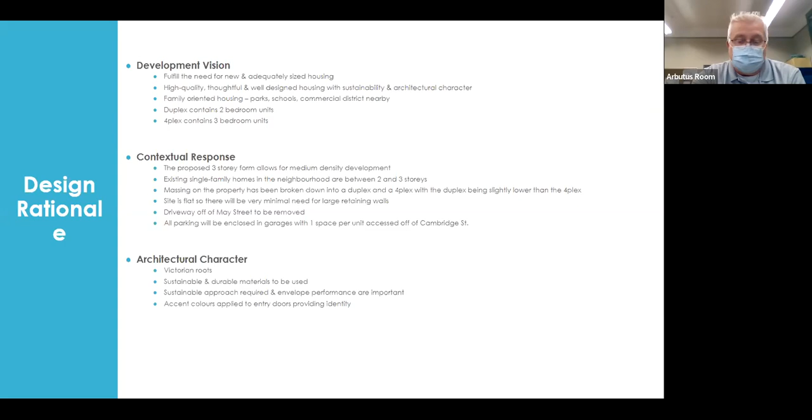So the proposed project seeks to transform the southeast corner of May and Cambridge Streets from a well-used duplex to a friendly duplex and fourplex with traditional neighborhood character.

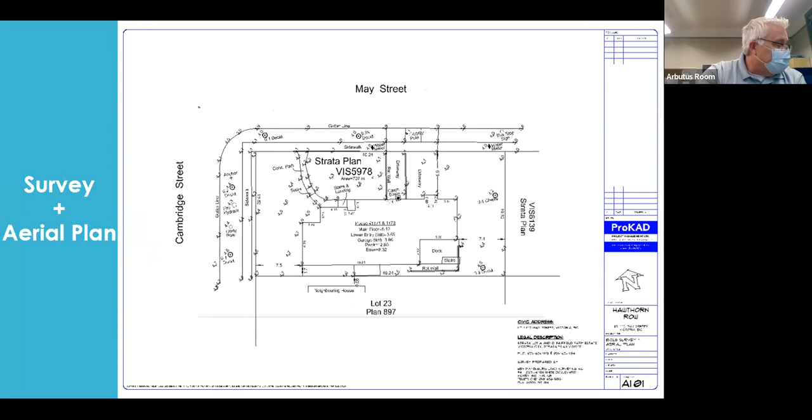So is this the PDF? Sorry, is this the PDF? There's some... okay, I'm going to skip over that one because for some reason...

And the other bottom corner is... how can I move that? It seems like it's in the way here, sorry. Where's my technical person? There we go.

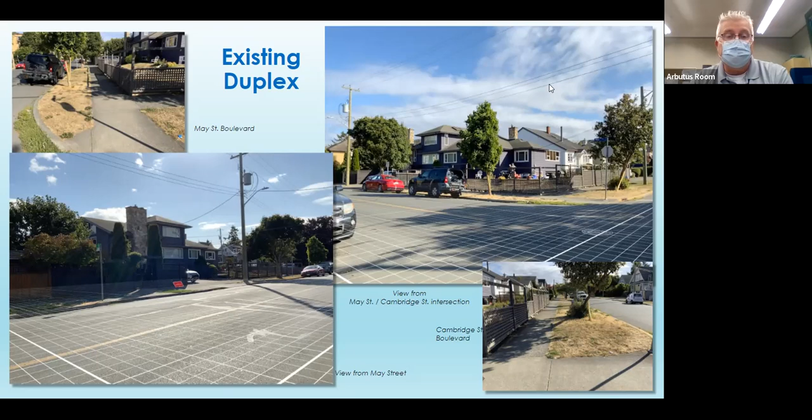The bottom one is looking down the Cambridge Boulevard, and that's where the access to the back of the units will be off Cambridge. The bottom left photo shows the driveway off of May Street. That'll all be removed, and it'll just be basically a sidewalk and the entrances to the units.

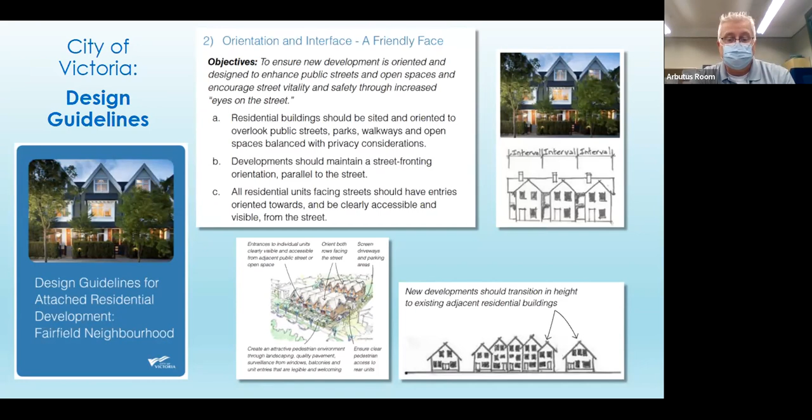In several articles, I'm sure you're all aware of the missing middle with regards to family-oriented townhouses, duplexes, row housing. We're basically calling this a row house style of design, and it seems like it's a missing component of the City of Victoria. We feel that the design allows for some family, some empty nesters even. My two clients are actually going to be owning and occupying 2 of the units, so 4 of the units will be on the market. Their intent right now is for them to be owner occupiers of the units.

Oops. Sorry. Oops, oh I'm sorry, not friendly with... there we go, thank you.

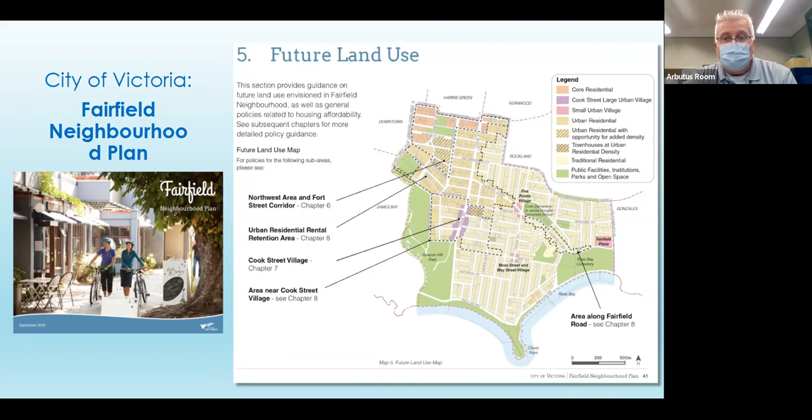Fairfield neighborhood plan, future land use. The property is in a traditional residential area outlined in the OCP, which allows for a 1.1 floor space ratio. What we've got here is 0.93 to 1. I'll get into those drawings shortly.

So the building types here are single detached dwellings, housing conversions, duplexes, and as it goes on it talks about generally ground-oriented residential buildings, including houseplexes and townhouses. So following the guidelines within the OCP.

Going quickly through the lower floor plans, each includes an enclosed garage, one visitor stall between units, a small den on the duplex unit, and a larger den/office on the fourplexes. They're pretty well identical units other than being flipped. The duplex, once we get to the elevations, you'll see is a little lower in height versus the fourplex.

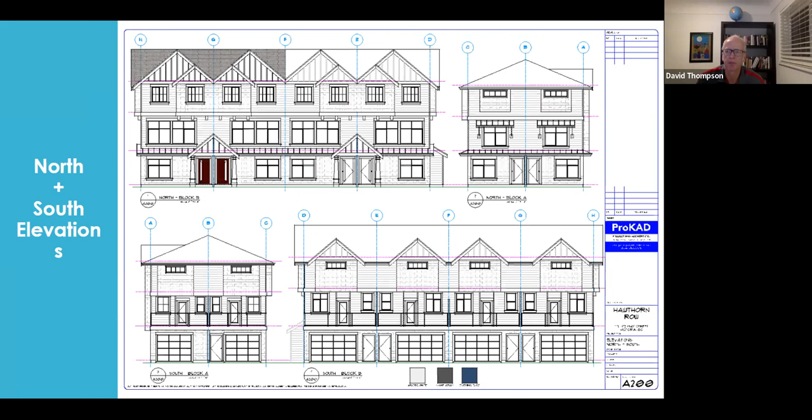Are you referring to this bottom elevation here that I'm showing right now? Yes. It's a tricky issue. Number one is you have a neighbor on the south side, so you don't want too much fenestration on that side, exposing yourself to that neighbor. You want to keep some privacy. I understand your question there.

If we look at the floor plan here, we've tried. There's definitely some ability to throw some more windows at a higher level as clerestory windows, or make them at least wider. Those aren't really private issues, so yes, that could definitely work. Once we get down to the main floor, there's an ability to increase some windows there as well.

But once again, you can see it's a storage area, it's a china buffet unit right now where people can put their dishes for their dining room table. And then there's a small window next to the powder room.

So, if you get down on the lower floor, I was proposing to have the doors glazed, fully glass, rather than having a white fiberglass door that you see on most houses, just to open it up a little bit but still keep privacy.

Yeah, that makes sense. So does that answer your question? Yeah, thanks, that takes care of it. I was thinking ground level would be best. That's great, okay, thank you.

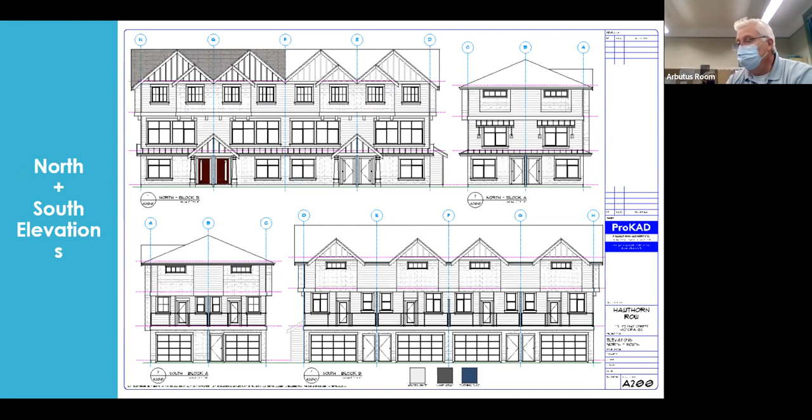Anybody else from the committee? Ashley, Dawn? Yes, Michael.

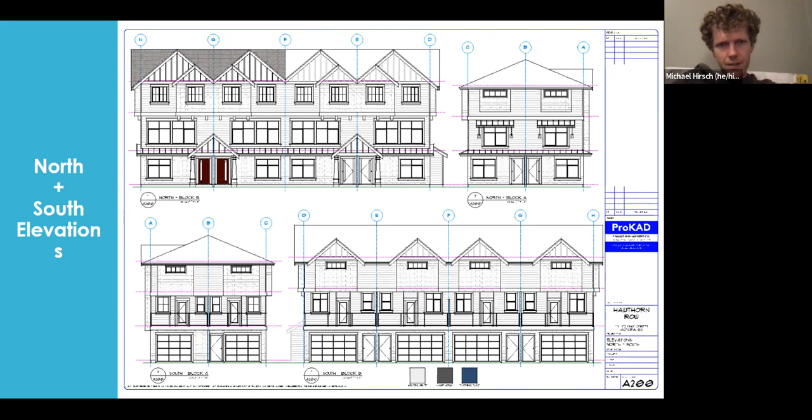I have a question, Joanna. Thanks for the presentation. I was wondering if you have any stats to contrast this with the current zoning, like in terms of height, site coverage, and maybe just curious what the square footage of this lot is. Just because I know right now this isn't on Cook or something, it's very much amongst the single family dwellings in Fairfield, to get a better sense of how this compares with what's there.

Good question. So basically we have here a site area of 8,582 square feet. Can you see that on here? Oh yeah, there we go, good. 8,582 square feet, and that's our floor space ratio of 0.93, where part of the neighborhood plan allows one-to-one.

I've had some preliminary discussions with Alec Johnson, city planner, about a year ago before we started designing and developing this. So there's no specific zone for this. He did give me a number of different zones. Excuse me one second, Gerald, do you mind passing me the folder there please? Thank you, sir.

He had, basically, the RK zone, the RT zone, and the RJ zone as reference for density, setbacks, site coverages, and so on. So honestly my next step was to hopefully go from this meeting to Alec and have some more fulsome discussion with regards to density and site coverage and whatnot.

But as far as relative comparisons, kitty corner to this there's a 3-story commercial apartment building on the corner of May Street and Linden. It's pretty monochromatic, just a square box, pardon the expression.

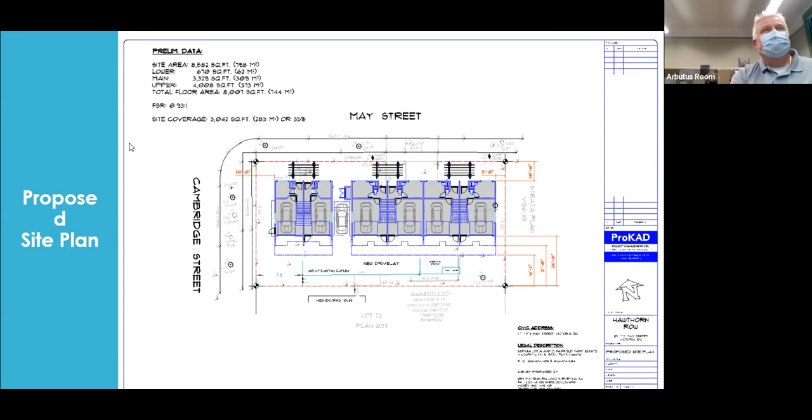So just on that last point, there's quite a tall duplex directly behind it, and then there's the 3-story apartment at May and Linden, which I'm not sure what the relative heights of those are — I was trying to figure it out on the map, I couldn't see it. But my question is about the end facing of the duplex onto Cambridge.

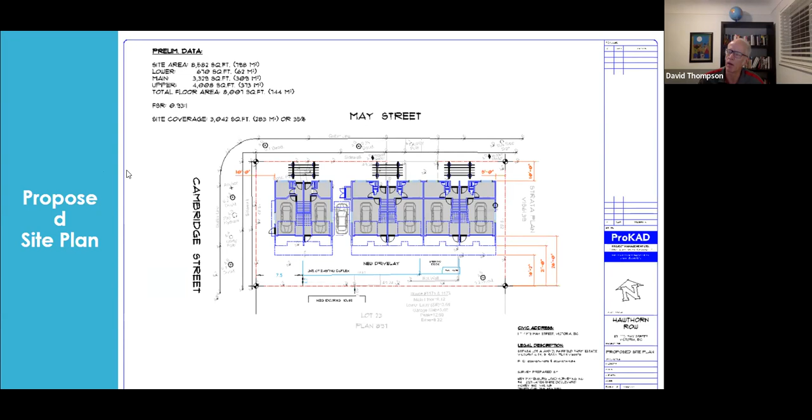Can you navigate to that slide? I think you were trying to show that there was an entryway there. Yep, certainly, just bear with me here. There we go, there it is. That's the top left one, right? Yeah, the top left one, the block here.

I was just wondering, partly out of interest in eyes on the street and CPTED type design, if there's any opportunity to have maybe a more traditional looking entry, with something above that door so it doesn't look like a utility door, and maybe centered, maybe a bit more window.

No, totally understood. Do I really like this? Sometimes when you do a design you look at it and go, yeah, I'm not quite happy with it yet, it doesn't kind of flow. So I totally agree with where you're coming from, Dave. It's missing something, and certainly I can work on that and make it more — you know this stuff way better than I do, and maybe plantings will change the aspect of it too.

No, good points. And I must credit one of the owners here that basically came up with that thought of bringing that to that side. So thanks, Stephanie, for that. I'll work on augmenting that a little bit and making it a little bit more friendly.

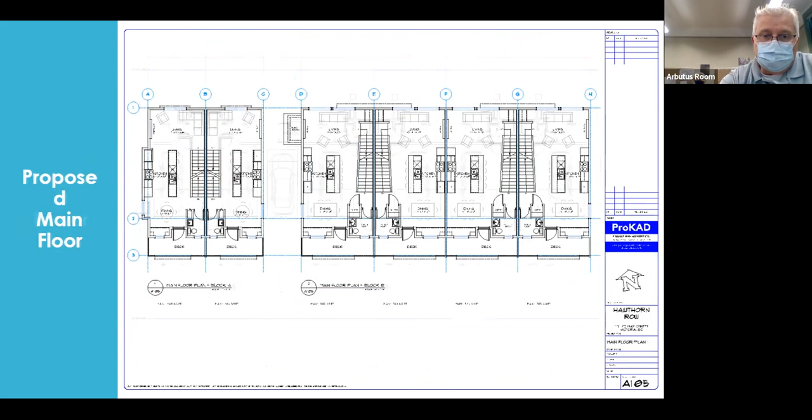And in the garage, if you want to go to the garage oversight, this is also one of the... it's not obvious to us. Now I see there's a den in each unit.

What about parking for bikes? Yeah, bike parking, we've got it. I don't know if I can zoom in on this, but if we look in here, there's a bike storage rack that would be included in all of these units. So there's a bike storage rack that's there.

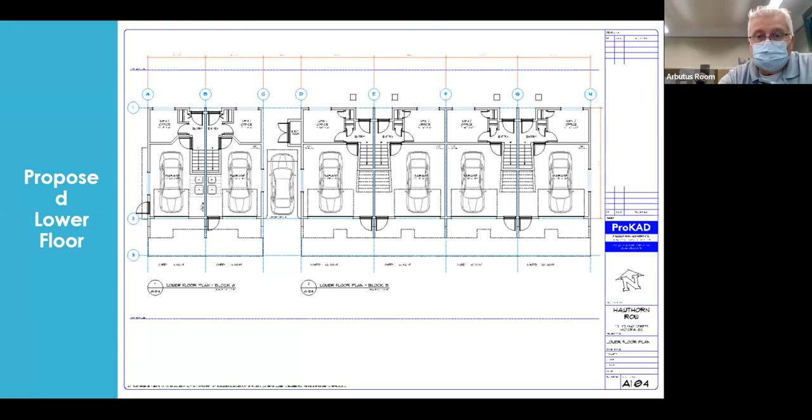Now this particular building I find quite interesting because it's level entry. And if you were to consider, because these are going to be resold, if I came to you and said I'm really interested in the end unit but I need accessibility - so I like the fact that it's ground level, but I'd like to put an elevator in there so I can get to the second floor.

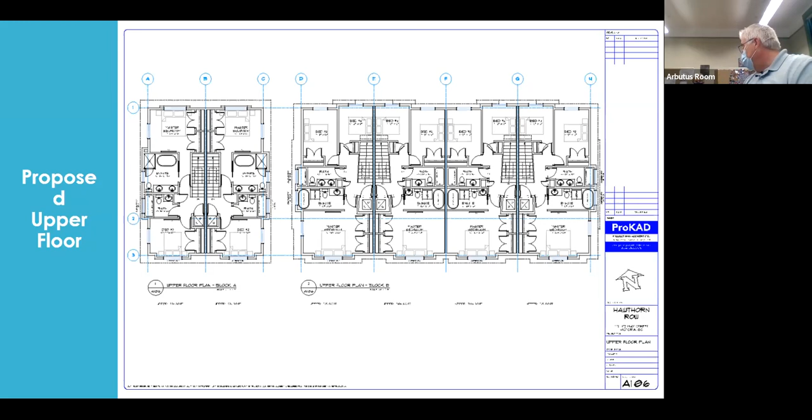Yep, and I'm willing to pay for that. Is that something that... most definitely. I've already talked to my clients about that. Once these units go on the market, if someone came to them with that request, I've already looked at areas where we can either put in a lift, or at minimum reinforce all the stair walls to allow for a stair lift up there, like one of those stair lifts that go up and follow the stairs. But we can include a lift somewhere into the plan - it'll sacrifice something in the space, but I've already had that discussion.

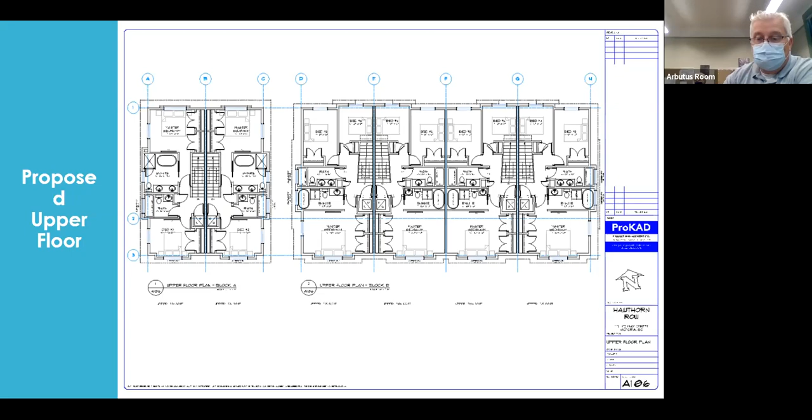And so green space is really not there. There's green, so the yards are all the front yards of the units. The end unit of the duplex you've got the side yard, and the end unit of the fourplex you got a little strip of grass. But basically the fronts with the pergolas and the gate, that's the yard per se as far as soft landscaping. In the back you've got the decks and pavers. We haven't had that fulsome discussion yet with regards to pavers or concrete, what we're going to do in the back to soften it. There's obviously a landscape strip on the south property line with the neighbors, so there'll be some softening of the landscaping there.

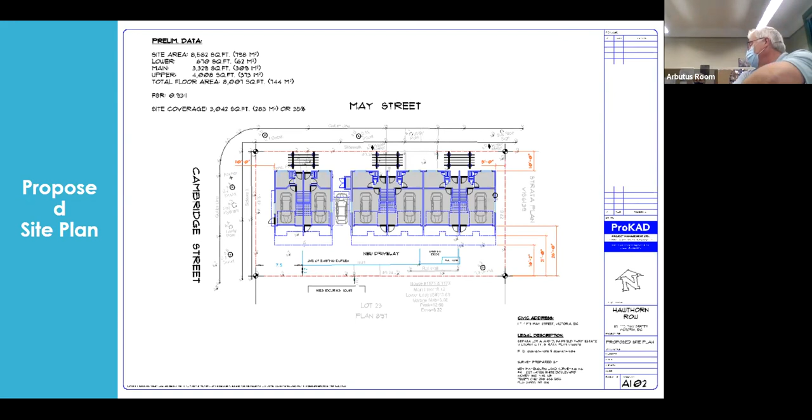No, the whole idea is to make it almost like precedent setting for that whole corner. I think we just want to have that - this project I think will be quite prominent coming to that corner and set precedent for others down the way.

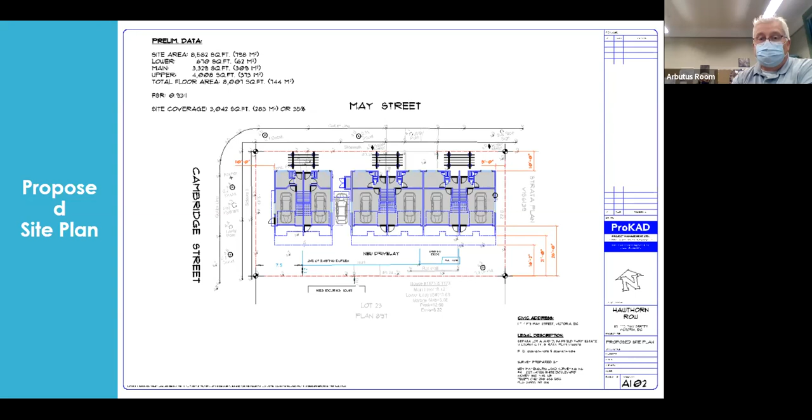Well, I don't have any further questions. Anybody on the committee? Dave, you have your hand up again?

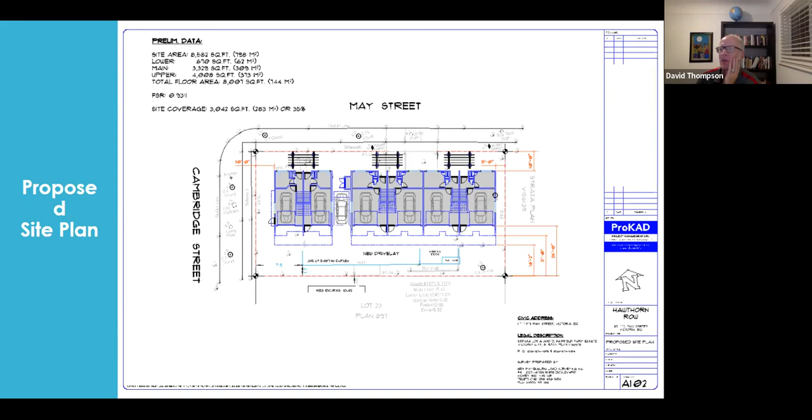Yeah, I'm just wondering if you could show me that Cambridge face again. I just had another thought. There you go, sir.

There it is. Yeah, and the reason I had this thought was because Joe is on the call, and I happen to know that he has a place down at Superior and Oswego that is designed a lot like this one, and it has on that second floor a balcony looking out on the street, and it presents quite a nice bit of community with the street. And I know because I lived in it, there was a good bit of interaction - we would be out on the balcony interacting with people on the street. So it's good eyes on the street for the back lane, as well as just a nice way to face the street.

I keep suggesting these things that raise price though, and that's not my objective here. No, but it's also blending in with the community too, very valid comments of what you've got there with having that friendly community, that connection with the street. So yeah, and I've also been involved with some crime prevention through environmental design type discussions recently, so it's all coming to mind. No, that makes total sense. Yeah, perfect, thank you for those comments.

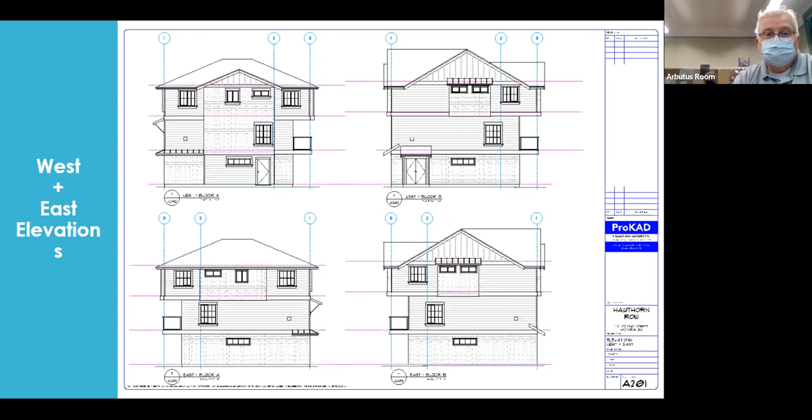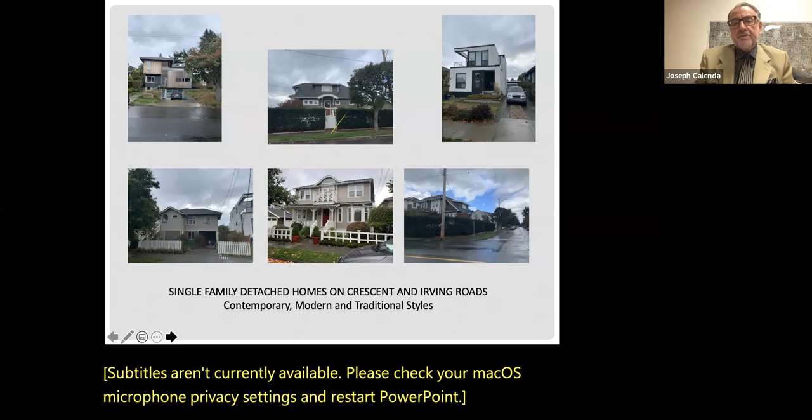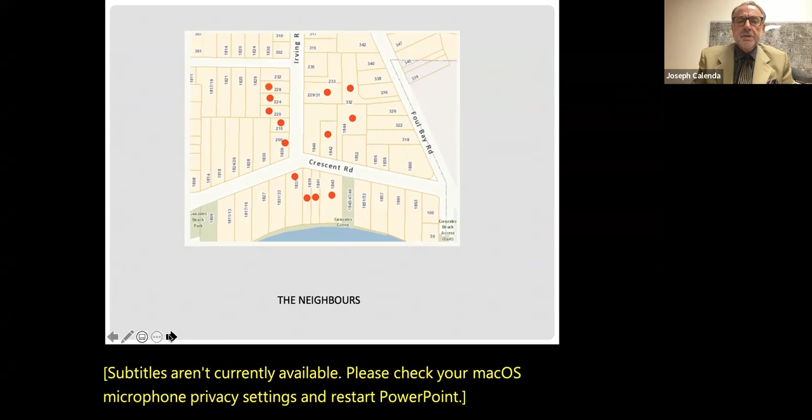These are photos of the houses around our house, and you can see that they're all single-family houses, and they come in a variety of styles, some more contemporary and some more traditional. This is a map of the neighbors that we contacted back in September of last year when we did our first small lot petition, and we intend to contact the same neighbors when we do our next small lot petition.

So this is our revised proposal today, and you can see in the profile that it's a 1.5 story single family house with a peaked roof, more traditional design. I just want to talk about the differences between what our design was in September 2020 and what our design is today in December 2021.

In September 2020, we were proposing 2 lots and 2 houses on 1,300 square meters of land. Today we're proposing 2 lots and 2 houses on 1,300 square meters of land. Our first proposal from September 2020 was a shed roof, modern 2-story house with 156 square meters of floor area, that's 1,680 square feet. Our design today is a peaked roof, more traditional design, 1.5 story house with 159 square meters, or about just over 1,700 square feet of floor area.

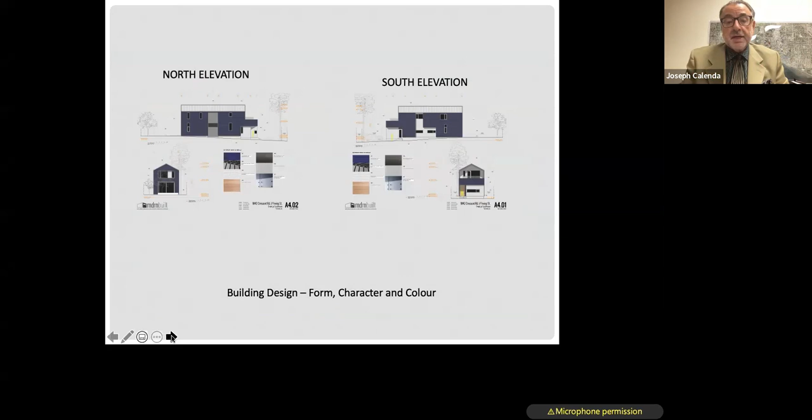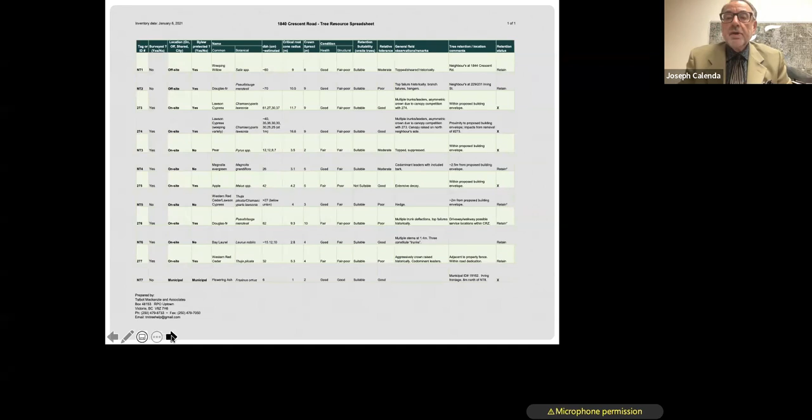We have a tree management report, and our tree management report indicates that there are 5 trees on the proposed small lot. 4 will be removed, including the apple tree, the pear tree, and 2 Lawson cypress trees. The Douglas fir will be protected during construction as per the tree management report. This is our catalog of trees on site, and it shows which trees are being removed and which trees are being retained.

More trees will be planted on site in replacement of these trees that are being removed. Our landscape plan shows the new plantings, and our site plans, building elevations, and landscape plans are available on the development tracker for anyone who wishes more detail.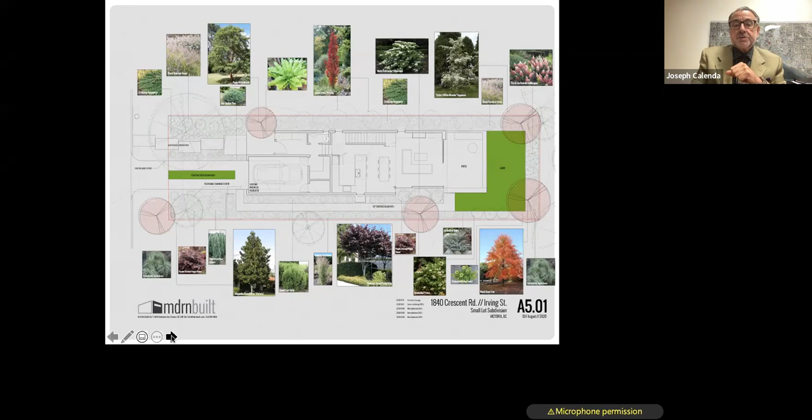So just to summarize, this application is already consistent with the Official Community Plan. It's already consistent with the Gonzales and Fairfield neighborhood plans. It represents good urban planning, good urban design, good landscaping, and good architecture. It fits on the site, it relates well to the street, it fits in the neighborhood, and it achieves the small lot design guidelines.

This application redevelops the site fully, completely, and sustainably, and carefully in consideration of future citizens. It takes the long view, and it doesn't underutilize the site in 2021. This is an almost 14,000 square foot lot with one house on it.

The environmentally responsible density value here is 2. So we're increasing the lot yield from 1 household to 2 households, all in a single family building form, consistent with the neighborhood as it is. So we say this application deserves to be approved on its own merits. It represents neighborhood planning best practice in 2021 as we respond to the housing emergency in Victoria.

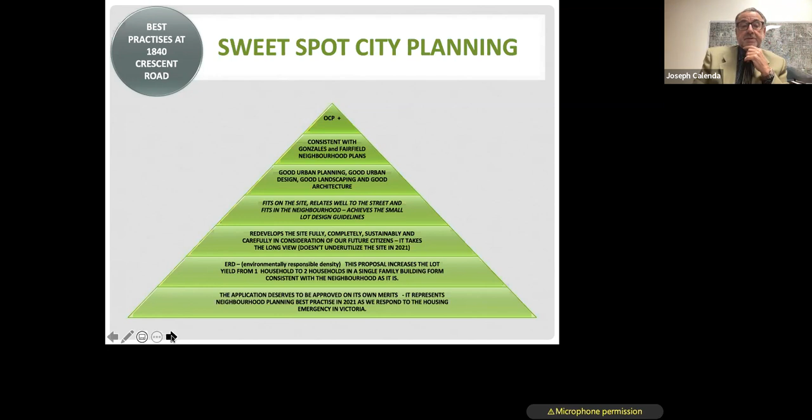So a small lot house on the corner of Crescent and Irving Road. Thank you for your consideration, and I'm looking forward to answering your questions.

Joseph, I just have a question about your presentation. We're not seeing any layout or specifics about the house as a building. Is that something that was omitted for a particular reason? Normally we see layouts and...

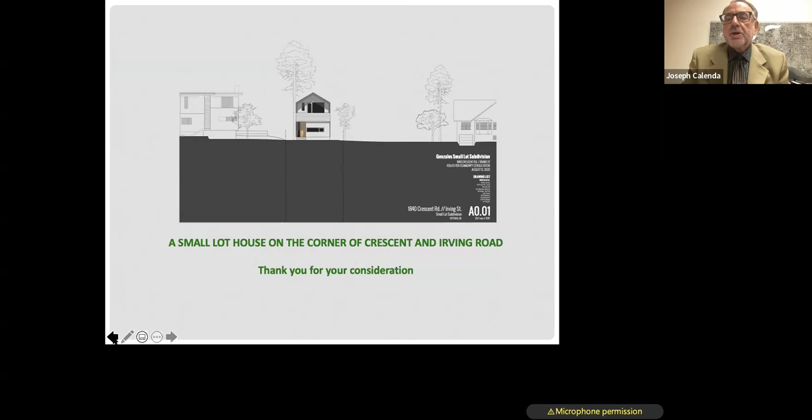I'm sorry, you're asking for a site plan layout that shows the house on the lot? Well, also often we see the layout of the new build, where the garage is, where the rooms, et cetera. Oh, I see. Okay, yeah.

So with the proposed small lot, with the house actually - so is it a 2-bedroom house, a 3-bedroom house?

Are you - oh, hang on a sec. Oh. Is this what you're talking about?

Yeah. Okay, so I must say, Joanna, I'm actually having trouble hearing you. Can you repeat the question, please? Yeah, I'm coming closer to the mic. Oh, that's better, thank you.

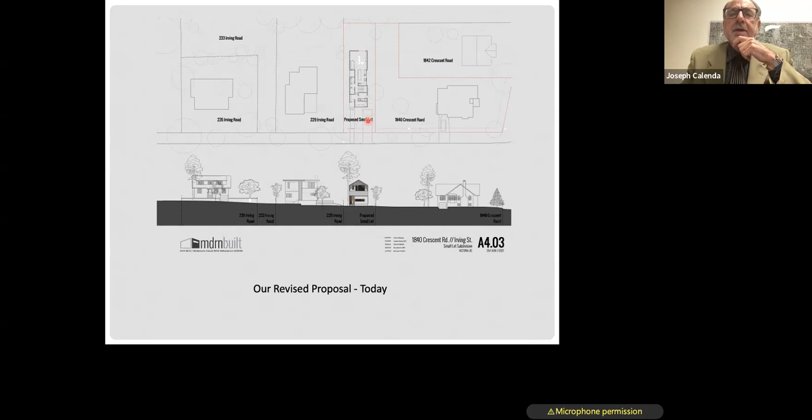What I was asking was if you had a slide with more information about the actual house, in terms of how many bedrooms and how it's laid out, where the parking is, where the garage is, that kind of thing. Okay, well the parking is right here, as you can see. And the house is a 3-bedroom, 2-bathroom house, 1.5 story. The floor plan is what I'd call a regular floor plan - you can get a sense of it right here.

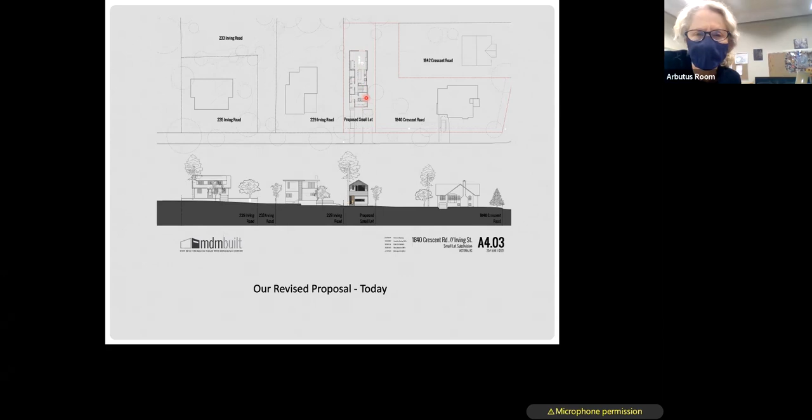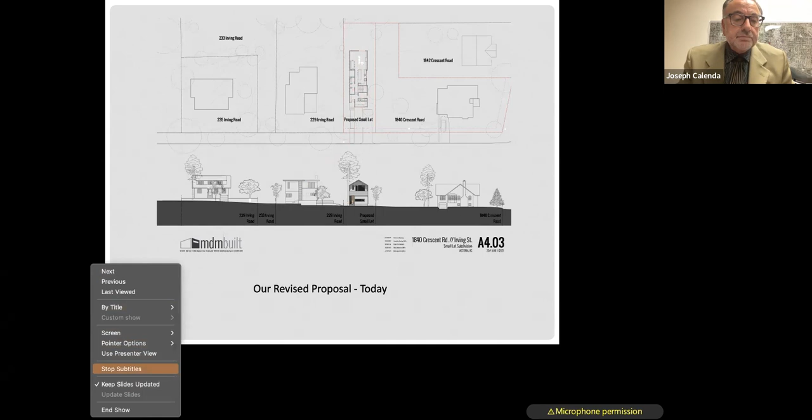Is there any way to increase that? Let's see. I'm trying to find that. No, I don't think so. I can't - no, I'm sorry, I can't increase that.

Okay, but you know, Adam Fried is here and he can probably speak to the details of the floor plan, although I don't have a slide that shows it. No, that's okay, I was checking to see if you did or you didn't. So just so I understand, the parking is like a slab parking space outside - there's no garage or anything. Is that correct? That's correct.

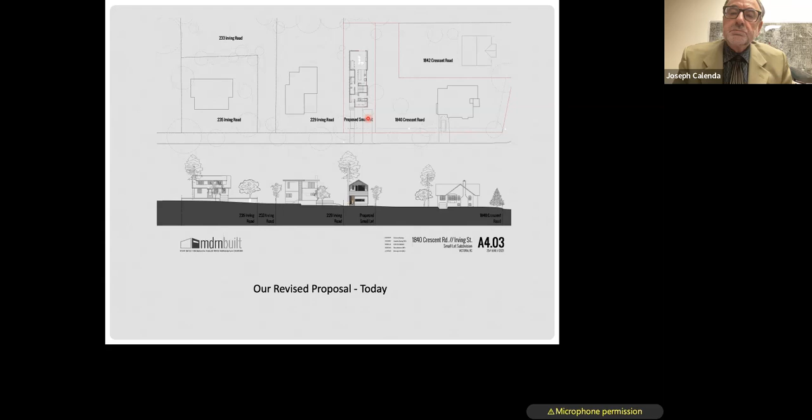Okay. So I have to go.

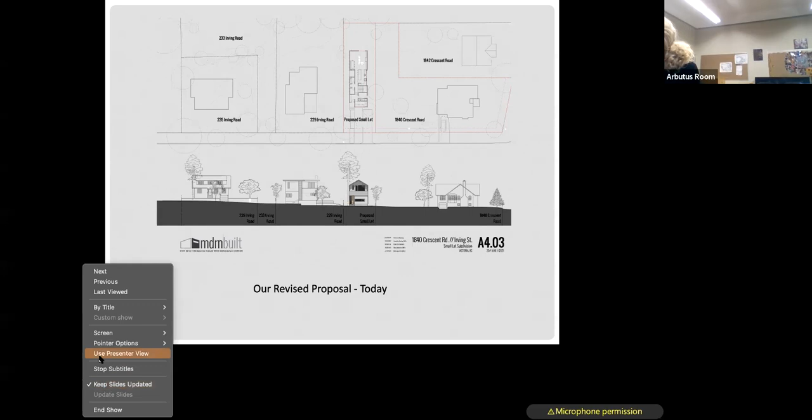Up here? Oh, view. Gallery? No, side by side gallery. Sorry, just bear with me, I'm just trying to - be able to see everybody.

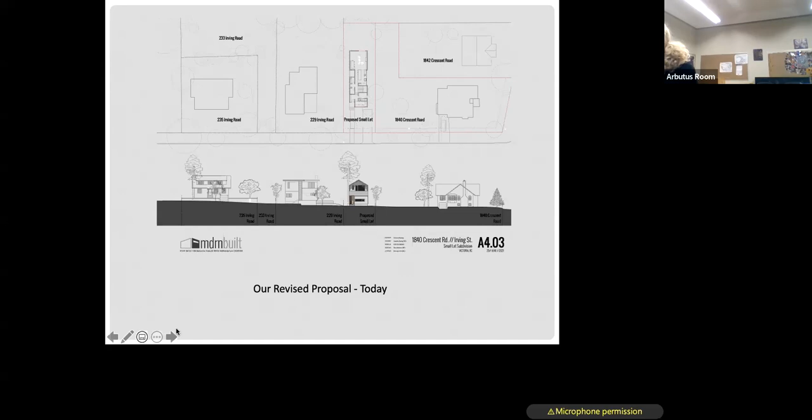Hello? Okay, so we can now open the floor to people who have questions. I'm just finding it hard to see because you're in a long line as opposed to a big block. We have had - we've actually had many emails about this project that we will be adding to the report we write at the end of this presentation, some in support, some not in support, various reasons. But this is a good time for anybody who'd like to ask a question or make a comment about this application.

Nobody? Any members of the CALUC would like to ask questions?

Yeah, I'll ask. Joe, did you say that you had spoken to the neighbors, and did you get responses?

When we first made the application in August of 2020, there was a small lot petition that was secured. I'll just go back to the map. This map shows the neighbors that were contacted for the small lot petition.

So what we did, David, is we considered the comments from the neighbors, and we spent almost a year revising the plan so that today we're at a revised plan. This revised plan, for the most part, reflects the comments of the neighbors. Clearly, it doesn't reflect every neighbor's comments because some neighbors have said, we just don't want this on that lot.

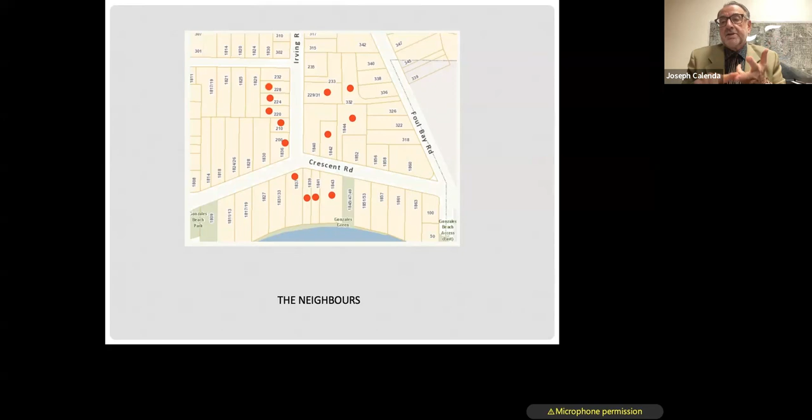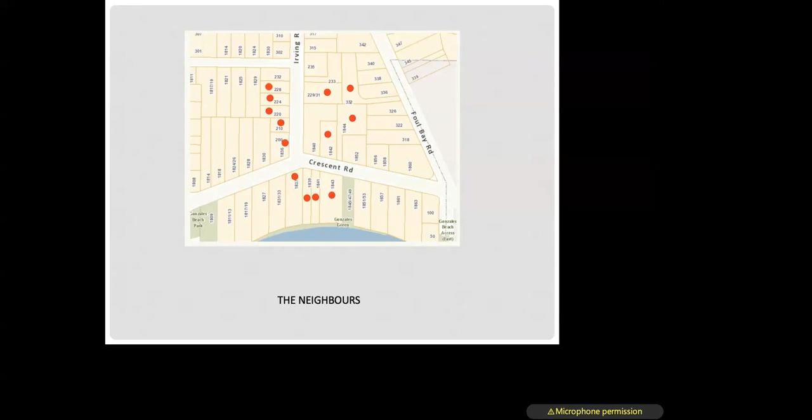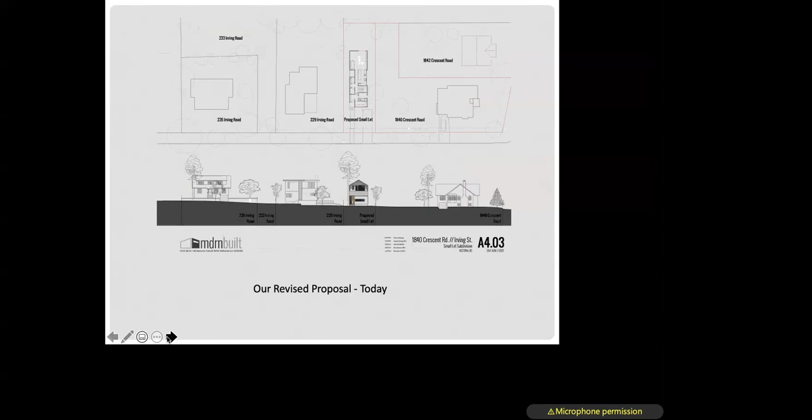Okay, so I have a few more questions unless I'm not seeing anybody else's hands up. So back to the house. Yes. And again, these are questions that we ask every applicant. So the heat source.

I wonder if Adam could respond to that. Adam Fryatt. Sure, let me see here.

I mean, it's kind of a little bit preliminary to talk about the heat source in a house that hasn't been approved yet, but it could be any one of a number of things. And there's a lot more options available now than there has been in a long time. So you can do an air source heat pump and run a hydronic system, or you can do an air source heat pump that runs a forced air system. Those would probably be the two most common.

I would imagine the decision is really going to be decided by the person who ends up building this house when the time comes. But those are kind of the standards right now for what I do in construction.

It's more, Adam, it's more just the consideration of it because we do work with our climate action committee here at Fairfield Gonzales Community Association.

Well, I mean, we're into the step code now, right? So building in the step code, you have energy requirements that you have to hit. So if you're building a step 3 home, which is by the time you get around to this, it's going to be a step 3 home, you're not really going to have a lot of options for heat sources that aren't going to meet whatever your climate or energy targets are, because that's the purpose of the step code.

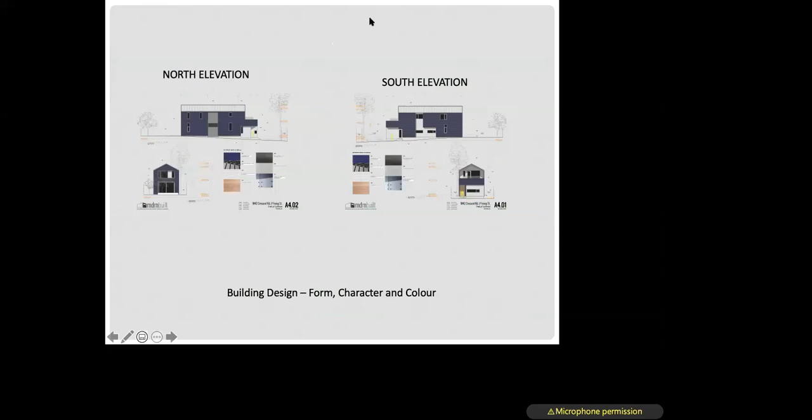Anyway, thank you both, Joe and Adam, for your presentation, and the members of the community who came to the meeting, thank you for doing so. And as I said, we've had lots of comments directly to our email, but also to the mayor and council, which will obviously get to mayor and council. So I wish you luck with your presentation, and community members can follow this on the development tracker when the application gets filed, and then you'll have more opportunities to comment, 30 days to comment that way as well.